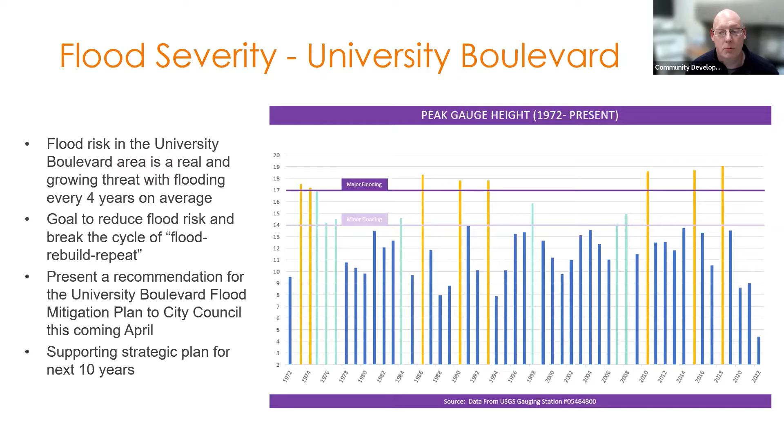Maybe to put it a different way, just like many of you, the City of Clive would like to be in a position in the future where there is little anxiety associated with the National Weather Service notification of a flood warning on Walnut Creek, because we've taken the time to develop a strategy and we've consistently executed on becoming resilient to this continuing and growing threat of Walnut Creek. Next slide, please.

And although we're going to spend most of our time tonight talking about specific flood mitigation alternatives that directly relate to the University Boulevard area, I did want to share that Clive is actively involved and looking for those broader solutions that we can develop with our upstream partners within the entirety of the watershed.

So what we found in terms of these broader partnerships: can we store water up in the undeveloped portions, or can we find ways to maximize storage in green belts and other spaces that already exist in our neighbors' communities, Urbandale, Waukee, Dallas County, etc.? Are there ways to partner up and find solutions that benefit Clive downstream? We've gone through and spent a lot of time looking at those, and we've had great partnerships with those neighbors.

But what we have found is that a lot of those solutions, although they are very good projects and have definite benefits, they don't necessarily solve or provide a significant benefit to this risk associated with the University Boulevard area. So again, we're not going to spend a lot of time talking about those. We'd be happy to engage in those other opportunities and other points of discussion. But I did want to let you know that we're not just thinking about what can we do in Clive. We're thinking about how can we find partners and really look at holistic solutions.

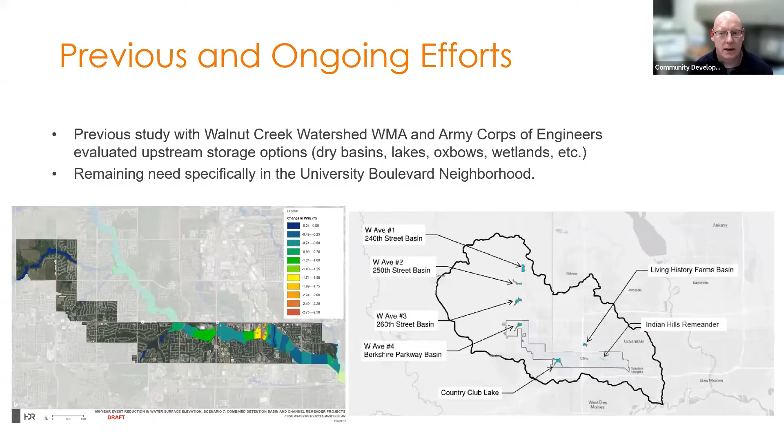So next slide, and we'll let Stantec jump into this and talk about this specific flood mitigation project for the University Boulevard.

Unmute, Jason. Gets me every time. All right, so this is Jason Schneider here.

I'll talk a little bit about the first part of the project scope here. It started with leveraging the existing hydraulic data, the capture of the existing flood reduction measures. And this is really going to keep our baseline consistent by leveraging this existing model. It gives us the ability to use data that Stantec produced for FEMA, that's on your National Flood Insurance map, allows us to leverage data that was produced by the Corps of Engineers, data that's being used by the Walnut Creek Watershed Management Authority in their plan. So it really gives us a baseline to keep all of the modeling and the efforts pretty consistent. So you're not looking at somebody else's models producing different results. All of the results should be really similar and very comparable.

We're going to look to identify some cost-effective and feasible flood reduction measures that fall in line with what the city already has ongoing with their efforts, their plan and priorities. We're going to explore some federal funding options. And then in the final part of this, we're going to develop a funding strategy for this University Boulevard area that can be implemented as presented, but yet flexible enough that as funding opportunities are available, it can be implemented in many different ways. We're going to continue the ongoing flood preparedness and response efforts in the interim as some of the other things that can be done as part of this scope.

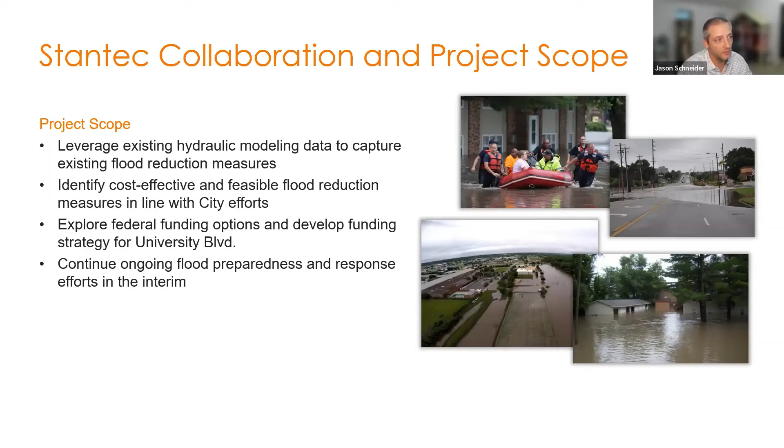Next slide, Jared. Kind of the agenda here. We're going to run through some other project overview items. We're going to talk about the infrastructure mitigation options. And when we talk about infrastructure, we're talking about building something really, levees, dams, that sort of thing is what we're calling infrastructure. We're going to discuss some building specific mitigation options. Some of the things here would be different types of flood proofing, and buyouts are the main mitigation options as part of this plan.

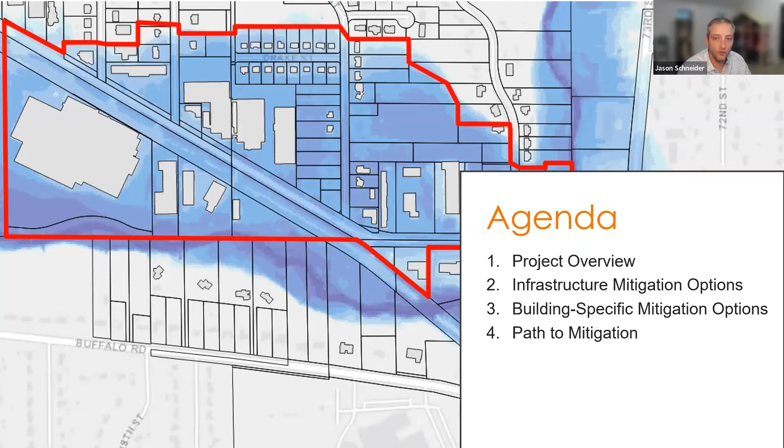And then finally, to conclude this, we're going to talk about the path to mitigation for the city and for you all as property owners and stakeholders in this area, so you've got a good idea of where this is headed and how we're moving forward. All right, next slide.

Next. All right, so the modeling approach, we used a base HEC-RAS model. It was very similar to the one produced by the City of Windsor Heights in their ongoing efforts. We did some updates to that model for our project area. We captured the buildings here, made sure they were blocked out in the model so there wouldn't be water where there's a building. We updated some of the terrain to make it more refined. And while the University Boulevard area is our area of focus, the project extends out to about 411 buildings in the entire model area. And what we're really doing with that is making sure that when we propose a mitigation option, it's not having a negative impact on any of the other buildings or properties or parcels in the surrounding area.

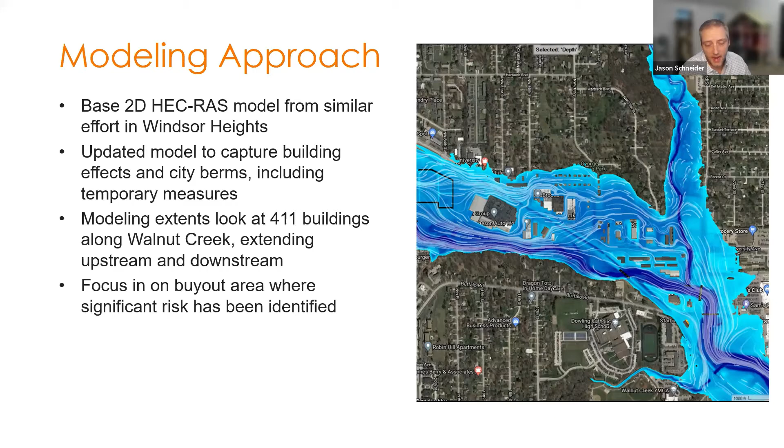Then we're going to focus in on the buyout area really when we do talk about our mitigation options. All right, next slide. So this is kind of a depth grid we've built. And this is the 1% or 100-year flood depths for the University Boulevard area. And I just want you to take a chance to look at this a little bit, see if you can identify where your building is or in the general area of your building and how deep the water is.

And this is going to come in handy because later on we're going to talk about lowering or raising water surface elevations or depths. And I want you to get some perspective of this area when we talk about lowering the water surface elevation. Does that really affect you? Because a lot of this University Boulevard area, the minimum flood depth in these areas is 4 feet. So it's some pretty significant flooding.

Some areas, 8 to 12, and most of the severe flooding where it's 12-plus feet deep is kind of in the channel area. But there's some pretty significant flooding in these areas here of Walnut Creek.

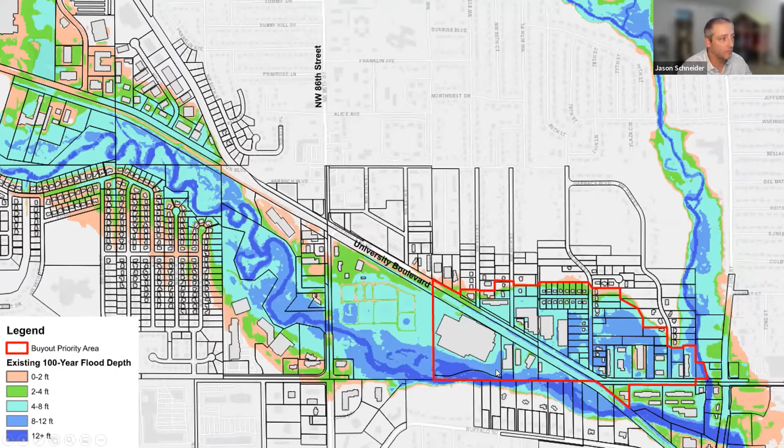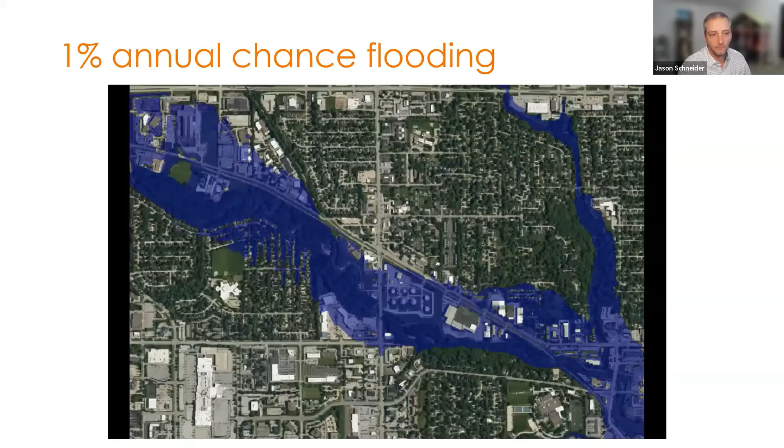All right, next slide. Jerry? Yeah, I'll take over from there, at least for a few slides. So that leads us kind of to the next steps. We run different scenarios through the models. We have to understand what the existing conditions look like, and then we are able to model these different alternatives that we'll talk about in a few minutes here.

And what we basically do is we compare the flooding depths for the existing conditions versus the proposed, and we're able to actually quantify the difference between those and run it through a benefit cost analysis, which is able to monetarily quantify what that gets us in terms of flood risk reduction. It's a good tool for being able to compare different alternatives to each other. So you'll see our preliminary results with that.

But also this is a requirement for many of the federal funding sources. We have to prove or analyze that any project that goes through certain funding programs is cost effective. And so this is a tool and a methodology produced by FEMA and the Army Corps of Engineers to make sure we're using consistent methodology. So we use those methods to consider these alternatives and compare them against each other, and also understand how these different alternatives would fare when we get down the road to that funding strategy.

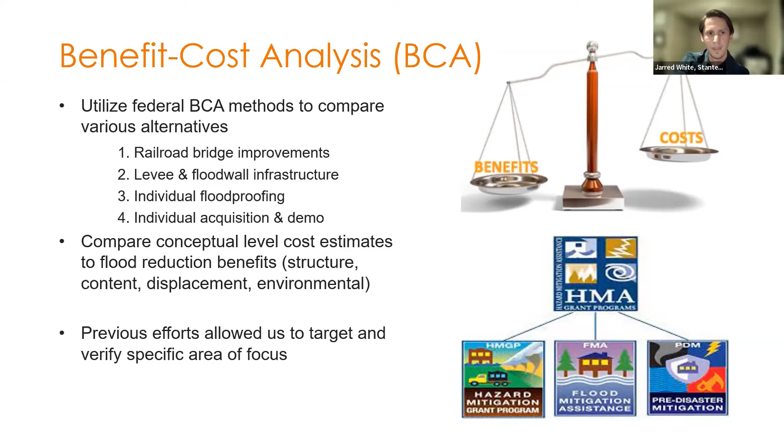So again, we've kind of hit this a few times, but it's important to understand where we're headed with this stuff. So the outcomes of this is, like I said, we're determining the feasibility of these different alternatives. In addition to getting those conceptual costs, we have taken a look at feasibility considerations. So it's one thing to say this project would cost this much, but we're also thinking in terms of how quickly we could get certain things implemented, what sort of regulatory requirements there are for the different alternatives, that sort of thing.

So obviously an outcome of this meeting and this project effort as a whole is to get feedback from you all, get feedback from the community, try to understand the individual preferences and thoughts coming from you, the property owners, seeing as it's your community, and it's always good to engage and understand where people are coming from.

So again, just the two bolded items, we're headed for a preferred alternative and a funding strategy. We want to see mitigation measures implemented. That's always our goal here at Stantec, and it's good to see communities able to reduce their risk and, like you said, Doug, alleviate anxiety around this stuff, because it's very, very damaging.

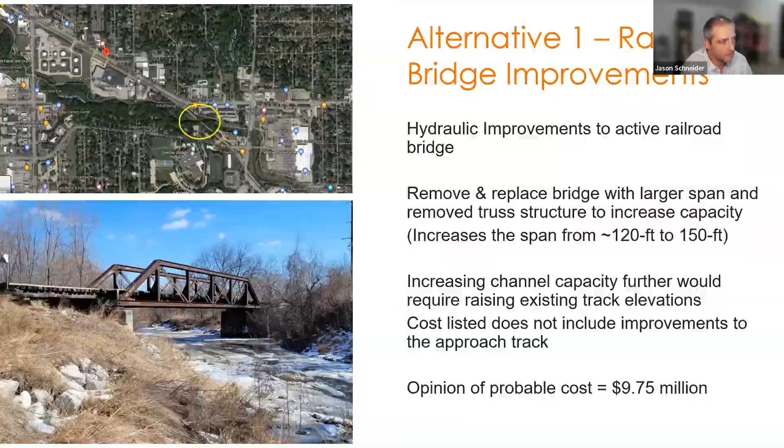So how we modeled this without actually designing a new bridge was we completely removed the existing bridge from the flood model and reran the model. And as you can see, if that was to happen, it does decrease the flood elevations in our area of interest. Half a foot at the most. Some other areas not quite a half a foot.

But again, I want to point out that a half a foot is quite a bit of decrease in elevation, but you're already talking about water that was at a minimum of 4 feet deep. So if you own one of those structures, having 3.5 feet of water or 4 feet of water in your structure doesn't really make a lot of difference to you as a property owner, and what kind of efforts it would take for you to clean up or rebuild your structure if that 1% or 100-year flood event actually ever happens. All right, next slide, Jared.

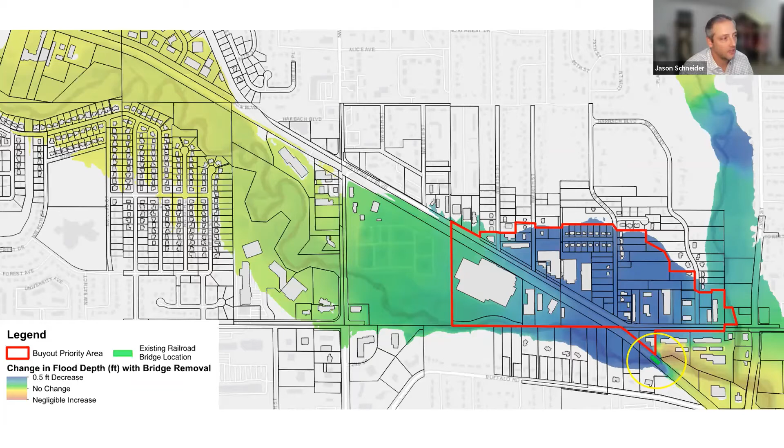So this goes into a little bit of what Jared was talking about, the benefit cost ratio and how much benefit are we going to receive. So the benefits for those structures and that base flood elevation, you get like $1.9 million of benefit for that $10 million cost. So that gets you a benefit cost ratio of about 0.2, and like we were saying, this is a very optimistic modeling scenario we've got going on here.

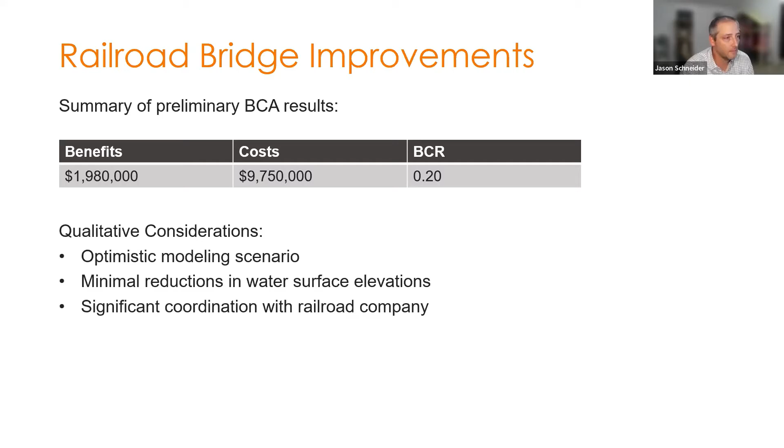And likely everything cost would increase only by the time you would ever be able to make this improvement in this area, with the cost of construction rising, cost of actually having to deal with the railroad, and all of those other things that can really add to a project that you don't really consider until you actually get into trying to implement something like this. All right, let's go on to the next one.

The next alternative we looked at was the levee and floodwall construction. This alignment and idea came from a feasibility study that the Corps of Engineers produced in 1992. And even that idea came from an older Corps of Engineers report. So you're looking at a levee and floodwall. There's almost 4,200 feet of levee, about the same amount of floodwall.

And in places, this levee has to be 20 feet tall in order to provide protection against the 1% or the 100-year flood event. And the cost of building that levee and floodwall is almost $70 million. And we've got a cross-section view here just to give you some perspective on what a 20-foot tall levee would really look like down in that area. It's going to be taller than your average one-story home that you might have.

So it would be a really big eyesore, and that opinion of probable cost also doesn't include things like annual operation and maintenance that the city would have to do if they had this levee. It doesn't include cost to actually acquire the easements or the property that would be required to build the levee, because when you get talking about a 20-foot tall levee, the footprint at the bottom of that levee is 132 feet wide, and that's a substantial amount of area.

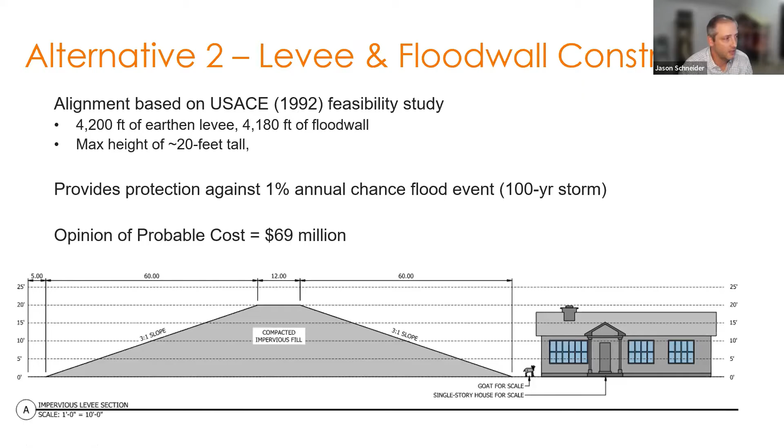When you talk about the distance between Walnut Creek and the railroad or University Boulevard there, in a lot of places, that would be almost the entire span. All right, next slide. This slide here shows you what kind of impact it has on the floodplain if this levee was built. The levee alignment you can see there in yellow. And this is also going to highlight why we looked at more than just the buyout area.

If you're familiar with the Indian Hills neighborhood, constructing this levee is going to actually increase the flood heights and increase the risk of residents in those homes alone. And for that reason right there, most likely you would never be able to build this because it wouldn't be permitted by the Corps of Engineers or FEMA to allow you to construct something that's going to increase flood heights on someone else.

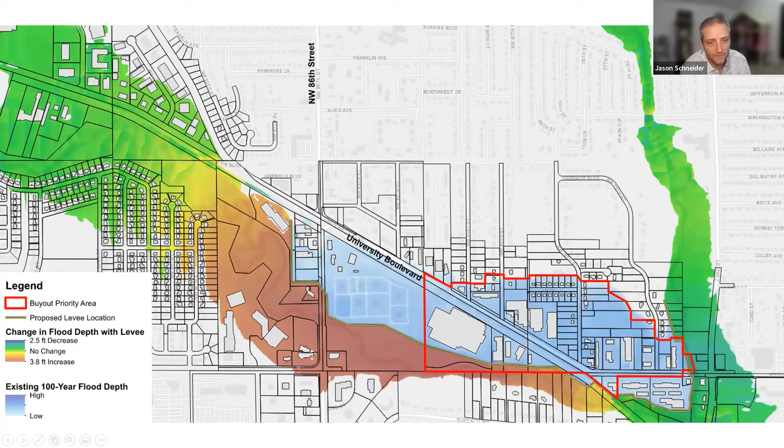All right, next slide. So the levee and floodwall construction, the benefit cost ratio here was 0.47. It would provide $32 million in benefits. The cost at 69 million. Like some of the things we covered before, this has got a very substantial construction footprint. It increases the flood heights in other areas. You're going to have significant velocity increases in the water, and it's really going to cause erosion concerns probably downstream of this area. All right, next slide, Jared.

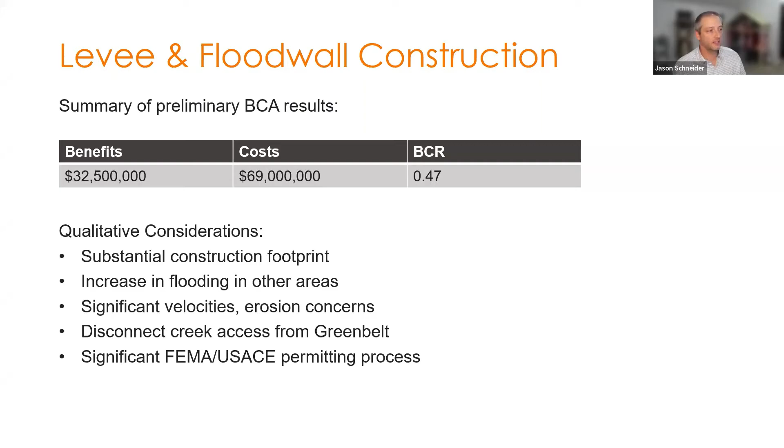All right, I'll take it back over from there. I want to make sure I made this clear. I don't know if I pointed this out specifically, but with the benefit cost ratios, obviously, the benefits need to outweigh the cost, so that ratio we need to shoot for is 1 or higher. So those first two options are not necessarily looking so hot in terms of feasibility and in terms of the likely cost effectiveness that would result from them.

So this lends itself to looking more specifically at building specific mitigation options. There's a lot of different building specific things you can do. We looked particularly at two: floodproofing and acquisition. So we'll just jump right into that. So alternative 3, we looked at what is considered dry floodproofing. It's basically retrofitting buildings on an individual level to be able to resist floodwaters. Two things of note. So this is considered active dry floodproofing, what we looked at particularly here and what results we'll share with you in a minute.

And the reason it's active is because it requires the placement of shields or barriers at any openings such as doors and things like that. So these projects would involve retrofitting these buildings, sealing the exterior, potential reinforcements. So like a masonry building wouldn't necessarily need reinforcements because those are pretty sturdy. But other types of building materials may require additional cost for those reinforcements.

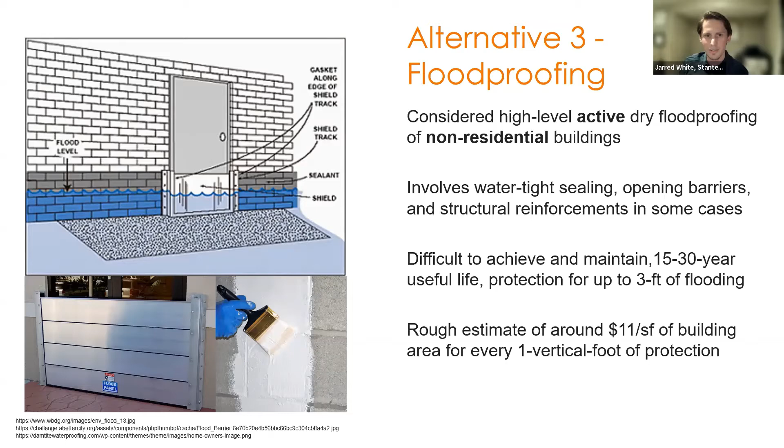So this isn't necessarily a great option for all buildings, but it is an option for some of them on the outskirts of the flood zone. So that's where we're headed with this option here. The costing of this depends on a lot of things, but we looked at it at, like I said, a more conceptual level. And roughly the cost that went into these is $11 per square foot of building area for every 1 vertical foot of protection. So I'll give an example here in a second. So if that didn't make sense, don't worry too much.

So here's an example structure. This is in fact roughly one of the buildings that we looked at here in the area, but we're not telling you basically the address of it. So we're not singling anyone out, but

Sorry if you can hear my cat in the background.

So we looked at a roughly 5,000 square foot commercial building with a masonry exterior, and it required 2 vertical feet of flood protection based on the requirement of hitting the 100-year or 1% annual chance event. Those are basically the same thing; we use those interchangeably. So it would require 2 feet to get to that 100-year plus 1 foot requirement, which is pretty common. And so that's 5,000 square feet times 2 vertical feet of protection times that $11 figure, and that gets to roughly $110,000 for this example building.

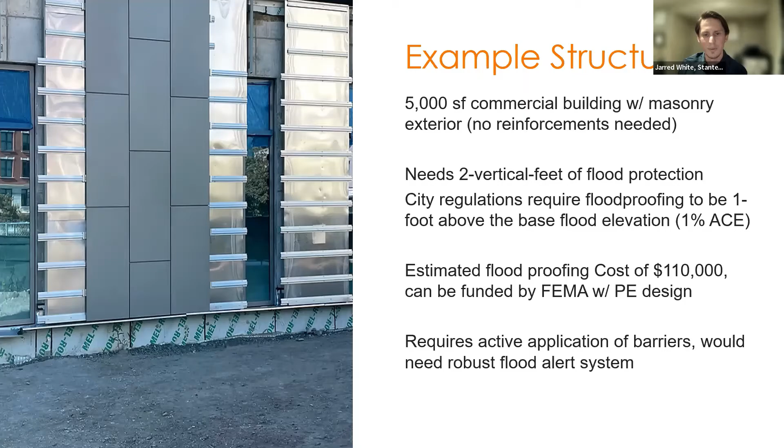So again, this requires active application of barriers, and it does rely on the flood alert system because you have to apply those. Otherwise, you still get plenty of flood waters in your building. So again, with these building specific options, and similarly with the infrastructure mitigation options, we're able to calculate these things as area wide numbers, but we're also able to hone in on what the impact is on a particular building.

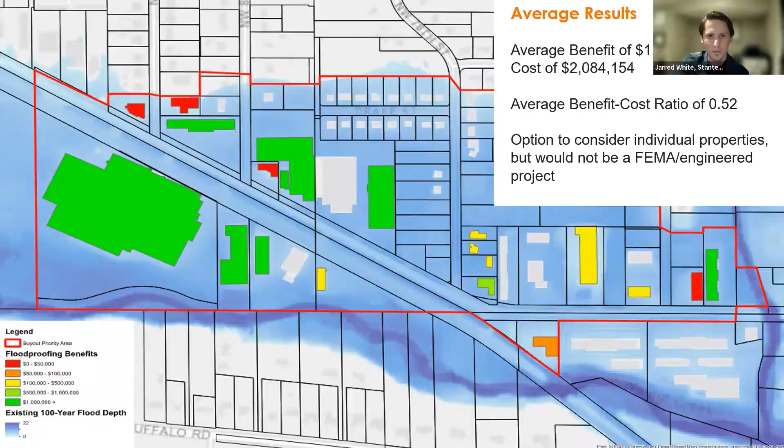And if you're getting discouraged by these lower benefit cost ratios, just sit tight. So that's kind of the gist of these results here, at the structure level. These are the results for the total buyout area, even though we would treat these on a structure-specific level. These are just the results for comparison to some of the other alternatives.

So again, this is fairly optimistic in the sense that we assumed it was true dry floodproofing, that no water would get in. But as we said, that is contingent on adequate maintenance over the life cycle of this mitigation strategy. It does leave residual risk because if a flood exceeded the 100-year plus 1 foot, you would still get water essentially overtopping that protected level and damaging structures further.

So we have to take these on a building by building basis. Sometimes this option tended to make sense, but sometimes it didn't. The costs were sometimes comparable to the final alternative we'll talk about in a second here, the acquisition piece. Sometimes it's far lower because sometimes it makes more sense to just retrofit a building than to spend a couple $100,000 to buy it out.

But in some cases, the costs of floodproofing the building actually exceeded the cost of what it would take to acquire the building. So those ones don't really make sense intuitively to go that route, but this is an option that we have in our back pocket here. That last bullet point there, this might make sense for some people. So this is definitely something we're keeping in mind.

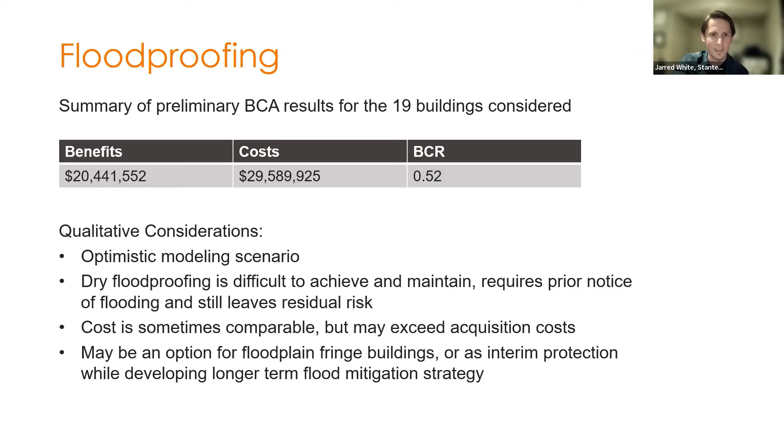Those may be some options too for addressing the interim need before we can actually implement the permanent strategy. We don't have that for this presentation, but that is also in the back of our heads. Just wanted to point that out. So those are the first three. Like I said, trying not to get too discouraged with the benefit cost ratios.

That leads us to the fourth and final alternative, which is acquisitions, which is a buyout program. So I will say, thanks to Doug and a lot of the great work he's done, we kind of knew this is probably where this effort was headed in the first place. But we wanted to make sure we vetted those alternatives and weren't missing anything as far as other options before we consider the path of basically buying out quite a few buildings in this particular area.

So for those that are unaware, this has been implemented. A few buildings have been acquired in the University Boulevard area. What it essentially involves is the city and whatever grant program is sponsoring it basically buys the property. They demo the property and then place a deed restriction on the land. So you can build some stuff, but you can't really build permanent structures after this type of mitigation strategy.

And this is really the only true flood mitigation solution that leaves no residual risk, because you're essentially removing the potential for risk by acquiring and demoing the building. Even some of the structural options, we engineer those things to be as robust as they can be, but there's always residual risk. It's like leftover risk. Things do fail, or things have to be maintained, or things only have a certain design level. So that's what we mean when we say residual risk.

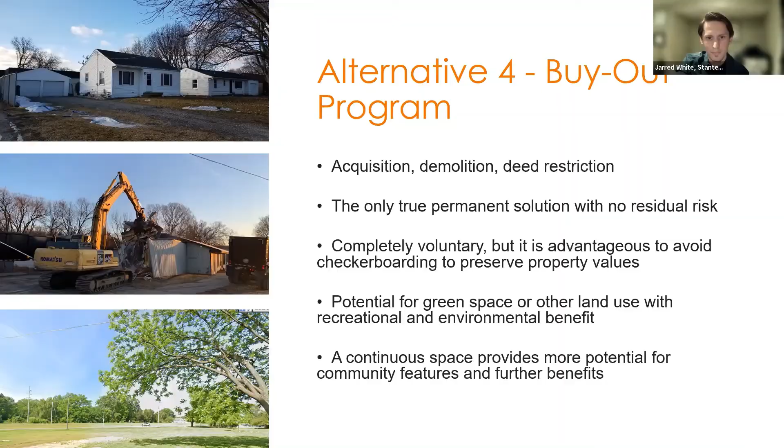So that finally leads us to a positive benefit cost ratio when we looked at, again, just the buyout area. What goes into the cost is basically the assessed value of the home, plus a markup to account for market value. It also includes an allowance for demolition, for things like potential asbestos removal, if that's an issue, and also some cost associated with restoring that plot of land to green space. So that's what goes into the costs. And then, like I said, the benefits are very promising for potential acquisition.

So some qualitative considerations here. It's a tricky time to be talking about purchasing properties. The housing and real estate market is very volatile right now, but we've got to push through with these types of options. That would also be the case with some of the other projects, in terms of the inflation environment we're experiencing right now. Construction costs are also notoriously volatile, in the sense that things are increasing right now. So pricing volatility was not unique to the acquisition alternative.

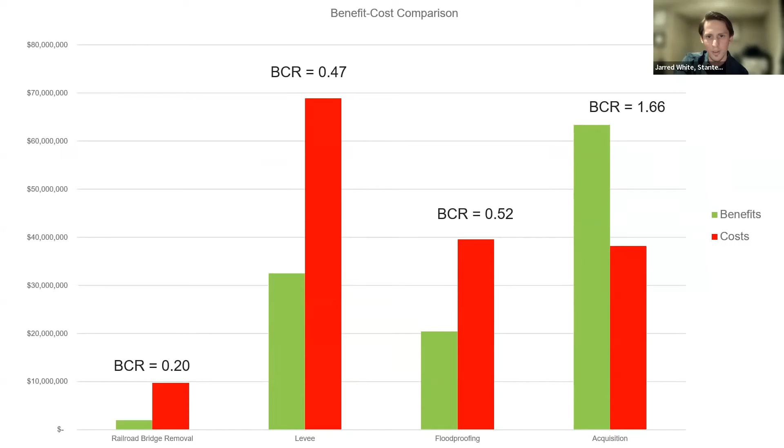So that gets us to the path to mitigation. Here's the summary of all those benefit cost numbers, and that really paints a picture. That's why we're headed in the direction of the potential buyout program. It has both the highest benefit potential and the strongest benefit cost ratio, given the conceptual analysis we've done for the costs and all the flood results. A couple more slides to get through, and then we'll shift over to questions.

So next steps for Stantec, working with Doug and the city: basically finalizing the results. I mentioned they're conceptual to some degree. We have the last query for additional data to factor in. There are a lot of different inputs going into this, so we're making sure we incorporate anything we missed for the final run. Again, we're trying to get input from you all and understand the individual circumstances that might be playing into this, and look more closely at these potential clusters. It's likely that we'll do these things in phases.

So taking those next steps to factor in input that we get from you all and see where that leads us as far as putting together a final funding strategy, which, like we said, is the goal of all this.

And one thing I will mention, we didn't cover this too much, but we are also looking at a scenario where we buy out particularly all of the buildings south of University Boulevard, kind of the worst area in terms of flooding, and redeveloping that land potentially as park space, or we're also looking at a stream restoration alternative to see if we can actually pull the water surface elevations and the flood depths down a little bit more to maybe allow for some of the people on the fringe of the floodplain.